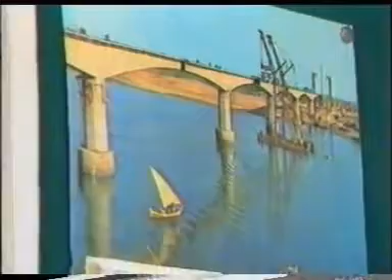For any civil engineering project, it is necessary to plan an appropriate soil investigation program. Investigation of underground conditions at the site is an essential prerequisite for economy in design and construction of foundation for any engineering structure.

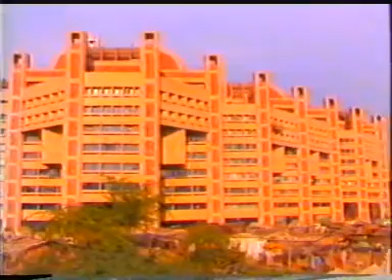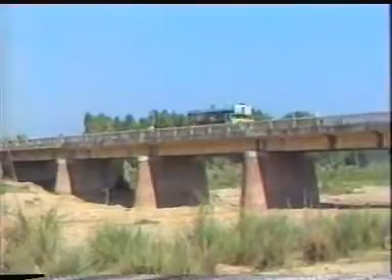The principal objective of soil investigation is to assess the properties and behavior of soil as an engineering material.

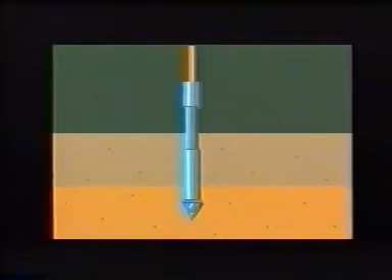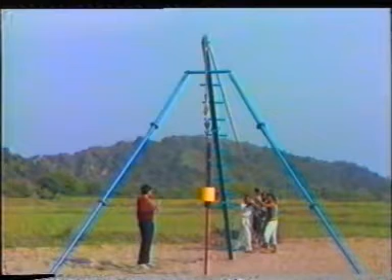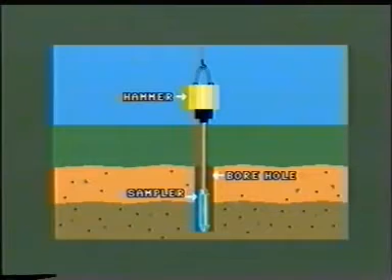There are many techniques and methods of soil investigation. These are boring, pit sampling, drilling, and geophysical methods. One of the major techniques to measure the strength characteristics of soil is by determining its resistance to penetration. A commonly used and relatively economical method is standard penetration test. In this test, a standard sampler is driven into the soil by the impact of a falling hammer to determine the penetration resistance of the soil.

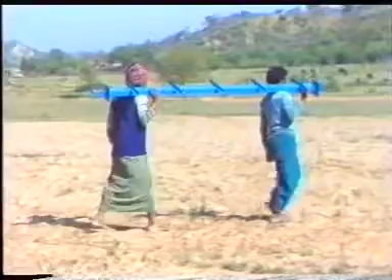Let us now see the equipment and procedure for conducting the standard penetration test.

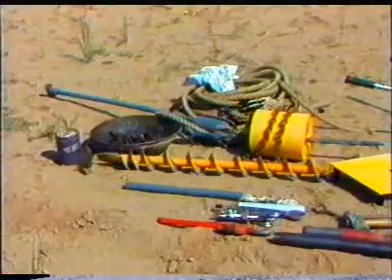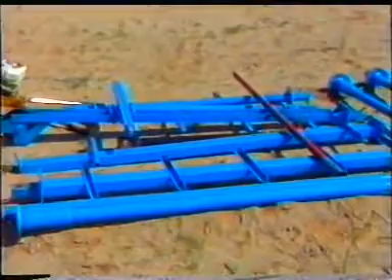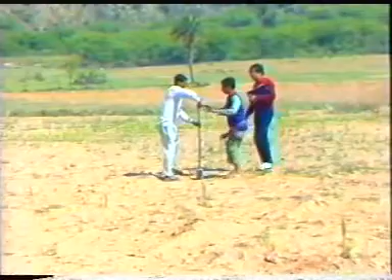The location where the test has to be conducted is marked on the ground. A borehole of about 100 to 150 millimeter dia is made up to the depth where the test has to be carried out.

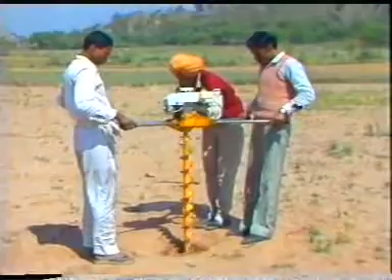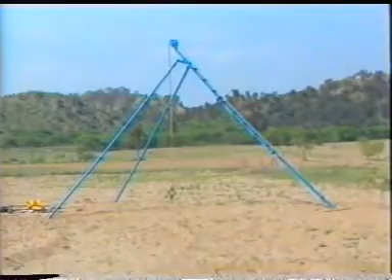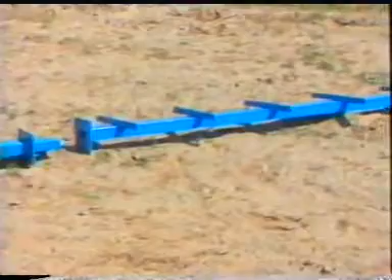This is how the test setup looks like when assembled. Two legs of the tripod consist of hollow pipes and the third is solid section. First of all, the tripod is to be fixed.

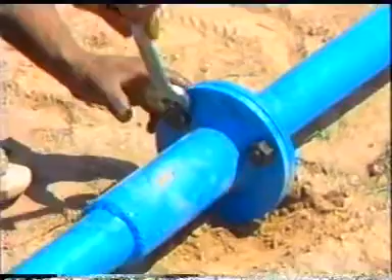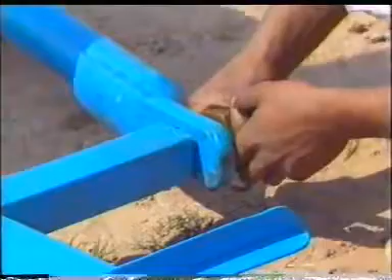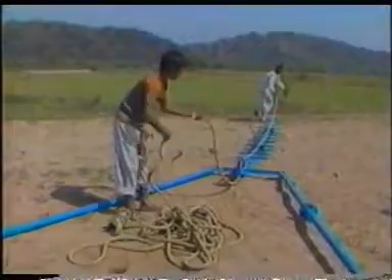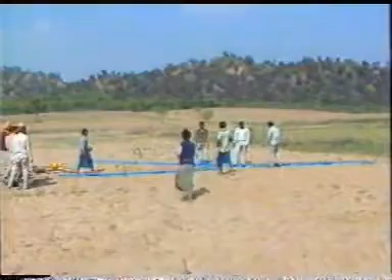Ensure that nuts are fastened tightly so that when erected, the tripod is stable. These nuts are fastened partially so as to keep these joints flexible. A thick and strong rope with an iron hook on one end is passed over the pulley. The tripod is thus ready for its erection. The tripod is erected by lifting it manually, giving adequate support from all sides.

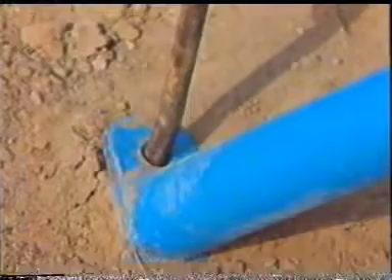The tripod is centered by adjusting the legs so that the hook suspended from pulley is over the bore hole. All the legs are firmly anchored to the ground by means of arrows.

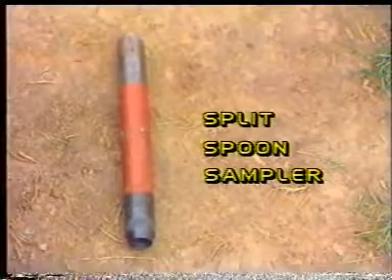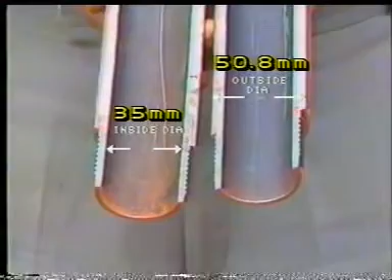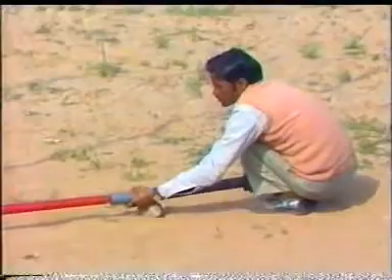The split spoon sampler used for penetration in this test has outside diameter of 50.8 millimeter and inside diameter of 35 millimeters. The sampler is cleaned and assembled. Check that it does not have a damaged drive shoe. The sampler head is now connected to the A rod using a coupling in between.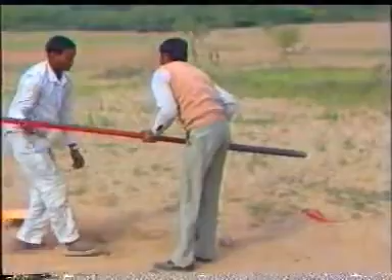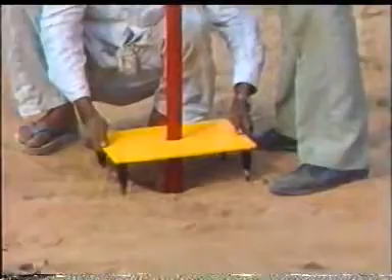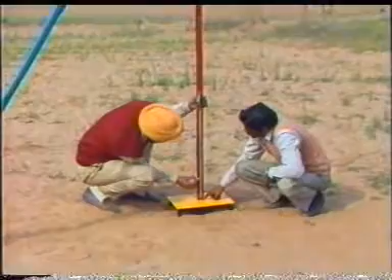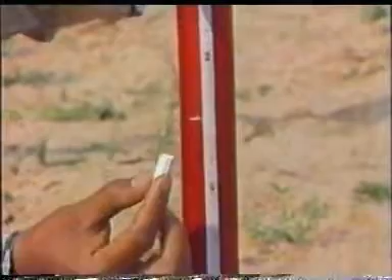The sampler is then lowered to the bore hole. To keep the drive rod vertical, a centric guide is inserted and fixed on the ground. Marks at heights 15, 30 and 45 centimeters above the centric guide are made on the drive rod.

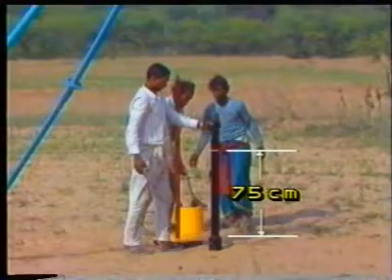A guide rod having a mark 75 centimeters above the driving head is connected through the drill rod using a coupling.

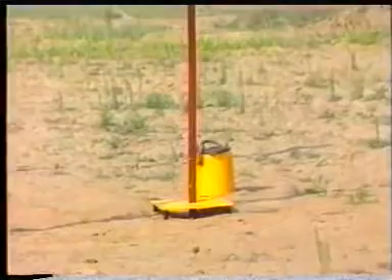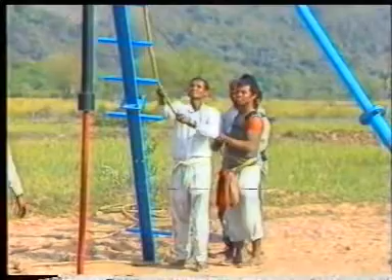The rope is lowered and the hammer chain is hooked to it. The hammer has a mass of 63.5 kilograms.

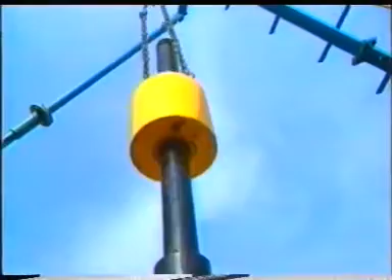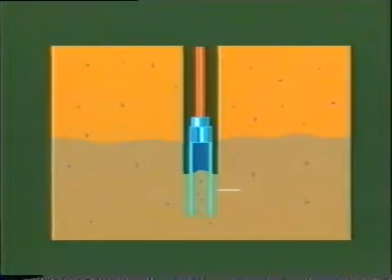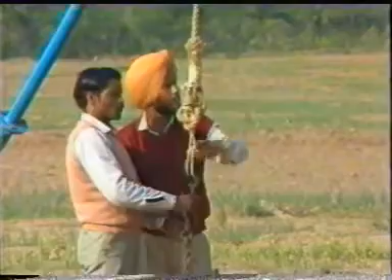The hammer is raised up to 75 centimeters mark and allowed to fall freely. In this manner, the sampler is driven into the soil, but number of blows for first 15 centimeter penetration are not recorded. Driving is continued for next 30 centimeter penetration, and the number of blows for each 15 centimeter penetration are counted. The total number of blows is known as the observed N value. For taking out the sampler, blows are imparted in reverse direction.

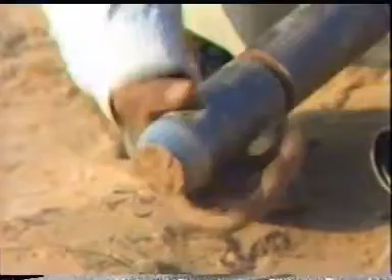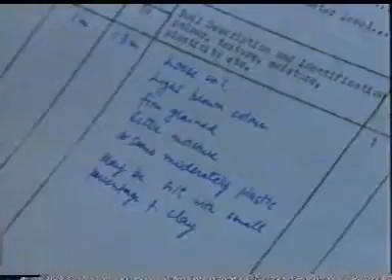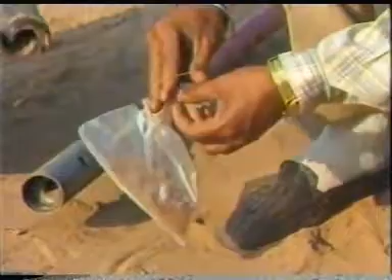Open the sampler and visually examine the soil sample. Observations based on visual examination are recorded in a proforma. Note that the sample obtained from the test is a disturbed sample.

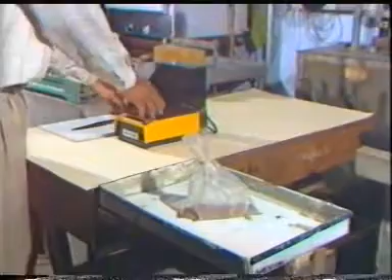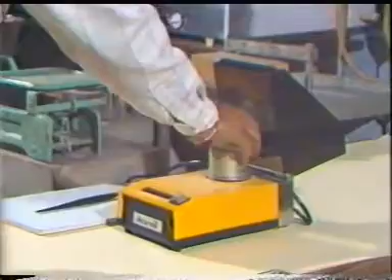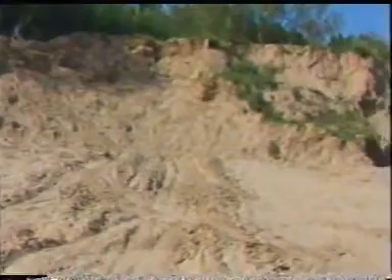The soil sample can also be used for relevant laboratory tests. The test is suitable for sandy soils which do not have gravels or rocky stratum. If the number of blows for any 15 centimeter penetration exceeds 50, the test should be discontinued and it is recorded as refusal.

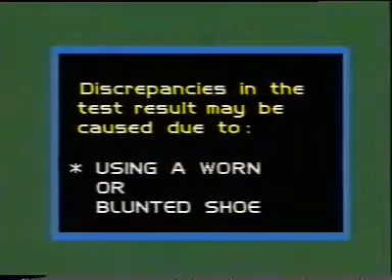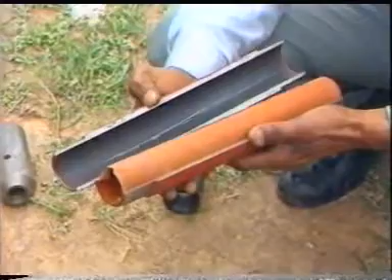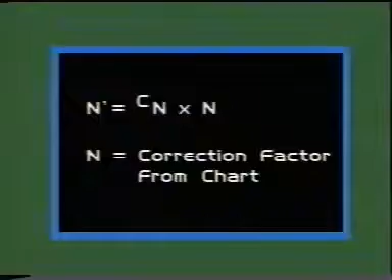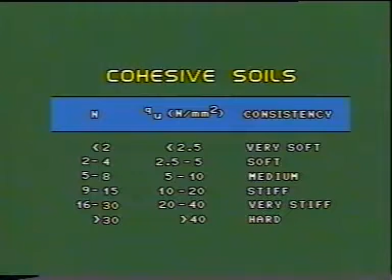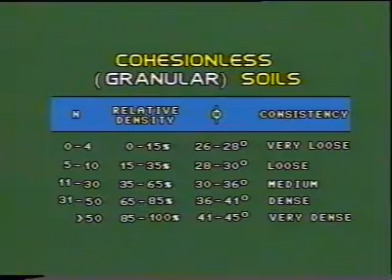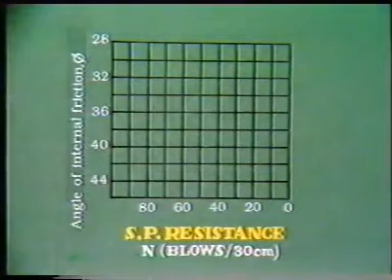For cohesive soils, with the knowledge of N value, it is possible to have an idea of unconfined compressive strength and consistency. For granular soils, based upon the N value, various parameters like relative density, angle of shearing resistance, etc. can be estimated. This graph shows how the value of angle of shearing resistance phi is related with N value.

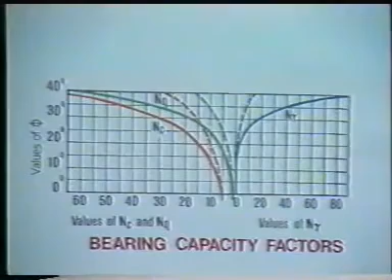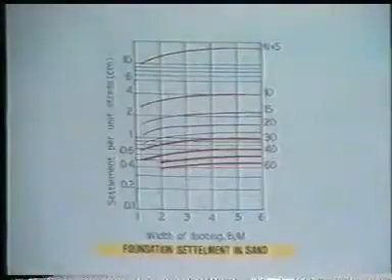From the same graph, the probable settlement of footings for different foundation loading intensity can be obtained. The N value is also useful to determine the bearing capacity in case of piles. Though N value has many applications, it should be used cautiously in dense saturated fine sand and silts and highly sensitive clays.

Now let us summarize. In standard penetration test, the number of blows required for 30 centimeter penetration of a standard sampler by a freely falling hammer of standard weight is noted. Knowing the N value, we can obtain information about various soil characteristics like shear strength, consistency, relative density, unconfined compressive strength, etc. This information is quite useful for design of foundations.